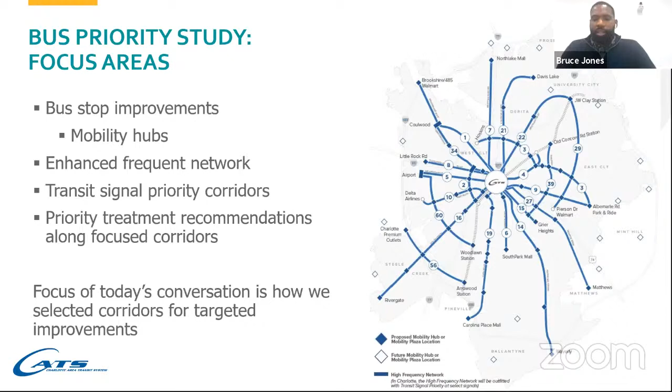In addition, we've identified focus corridors where we'll identify additional treatments we could potentially roll out to help improve speed and reliability. That'll be the focus of what we're looking at today in this presentation, and also the open house I'll mention later.

Before we get there, I mentioned some bus stop improvements we'll be looking at. This is one example of a mobility hub, known as a mobility center. Mobility hubs are important because they provide vital connections for riders, making it easy to transfer between different services. Picture what we have at our light rail stations — when connecting to and from light rail and bus, think of JW Clay or University City Boulevard station, where we have dedicated space for buses to lay over, and easy transfer connections for individuals accessing the rail line and the bus lines.

Picture that service, but then mobility centers can also be lower level in terms of Rosa Parks Transit Center or Eastland Transit Center, where we have connectivity between different bus routes that interact there. We also have dedicated space if we need to lay over, if the bus needs an end of the line point there.

We're also looking to improve mobility centers in regards to implementing additional amenities such as bicycle storage, off-board fare payment, and additional services to help speed up the boarding process, and also make it easier for individuals to connect to and from the bus network and other forms of mobility.

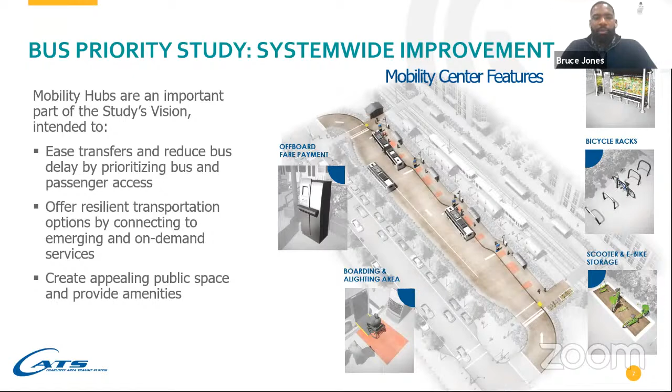Similar to a mobility center, we also have the mobility plaza. This operates where you have two routes that intersect at a major intersection. We'll have four far side stops so that we can provide easy transfer connections on the street level for individuals. Far side essentially means that we place our bus shelters after the signal.

Signal priority is being rolled out on our network. The way this works is that we'll be able to get through the intersection or clear the intersection, and be able to serve the stop so that we can drop off passengers without being delayed at the intersection. This also features improved amenities such as crosswalk improvements so that individuals can safely navigate to and from the bus stops if they need to transfer.

Additional amenities too, such as real-time information signage, wayfinding signage, bicycle storage, and also scooter storage, to help improve that first mile, last mile connectivity that I mentioned earlier.

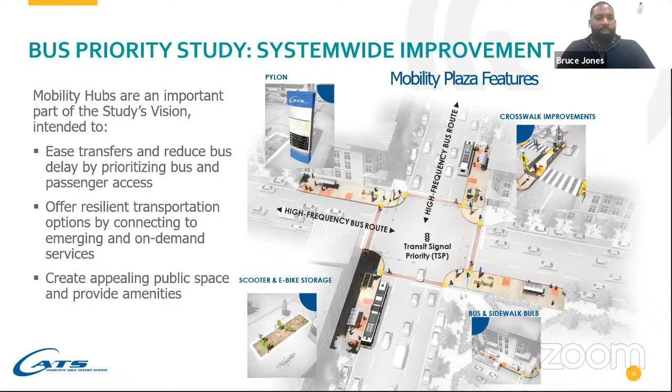So I spoke to the system-wide improvements, and now we'll go into the types of bus delay that we face and why it's important for us to implement priority treatments. We have a number of potential delays that we face on our bus routes.

The biggest one is dwell delay, meaning the amount of time that it takes for our buses to stop and pick up passengers - the amount of time it takes for the bus to stop at the bus stop, open the doors, pick up passengers, drop off passengers, and then continue to the next bus stop. That's what's known as dwell delay.

There's a number of factors that can contribute to that: stopping at bus stops, the amount of time it takes for individuals to board, the amount of time it takes individuals to pay their fare, and also if you're loading a bike, we typically have a bike rack for individuals to store that. And also the amount of time it takes for you to find your seat. So there's a number of factors that contribute to dwell time delay.

In addition to that, we also face signal delay - the amount of time it takes for us to clear an intersection or get through a traffic light. We have delay like any other vehicle in traffic, including waiting in line at the intersection. That's where signal priority comes into play to help us clear that so that we can get through intersections without facing increased delay times.

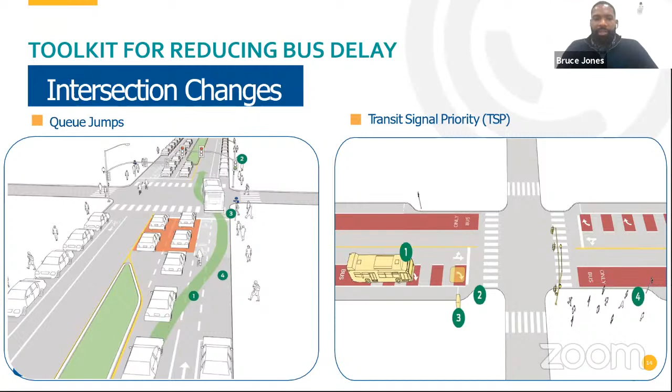How this works is the bus will pull up to a designated spot at the intersection. Once it reaches that point, it'll get a special signal that permits only the bus to continue, so it essentially jumps ahead of stalled traffic. All other traffic at the intersection would still have a red light, and pedestrians would not be able to cross. The only vehicles able to clear the intersection will be the buses, giving us a head start to clear some of the congestion we face there.

In addition to that, looking at how we roll out our bus stops is another key component, looking at how we can improve the bus boarding process by offering real-time information. That includes signage, but also the new real-time app we recently rolled out. This provides real-time arrival information on our buses so individuals can understand and know when their bus is running behind or on schedule, and adjust their schedule as needed.

Also offering enhanced amenities at the bus stop, making sure that we have amenities in place that help speed up the bus boarding process, and also looking at how we can provide a comfortable experience for passengers as they wait for the bus.

In addition to that, looking at where we can consolidate potential stops. If we have a stop on every block, that means the bus would have to stop more. So we look at strategic locations for bus stops so we can travel along routes quickly, but also build on offering additional amenities so that if individuals have to walk further to get to a bus stop, the trade-off is they would have amenities such as seating with shelter and coverage to help protect them from the elements.

In addition to that, yield-to-bus rules and extending the sidewalk as well, so that we don't have to pull over to the curb and face those delays with re-entry to get back into the line of traffic to continue along the route.

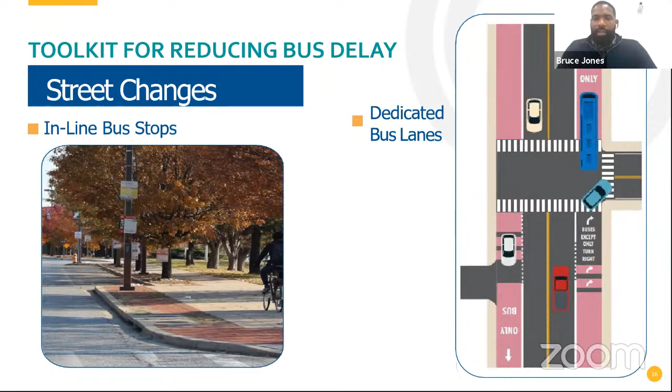Next, we have fare collection changes. This is where we have off-board fare payment. A number of you might be familiar with this if you use our light rail stations, for instance—a lot of our light rail platforms have the ability to purchase fare before you board the train. So we're looking at how we can implement or integrate something similar at the bus stop level as well.

And then also looking at how we can move towards non-cash fare payment, using maybe smartphones or any other type of solution, so that we can help speed up the boarding process as well. These are all toolkits that I mentioned for potential treatments.

We have two other examples, including all-door boarding and level boarding. All-door boarding includes picking up passengers from both doors at the bus stop, giving individuals the ability to pay fare at the back of the bus as well, which helps speed up the boarding process.

And then also level boarding—similar to what we have at our light rail stations, where individuals are able to board the train without an ADA ramp being deployed. Having level boarding at our bus stops helps improve and speed up the boarding process for individuals traveling by wheelchair, or if they have a stroller or another similar item they're boarding the bus with.

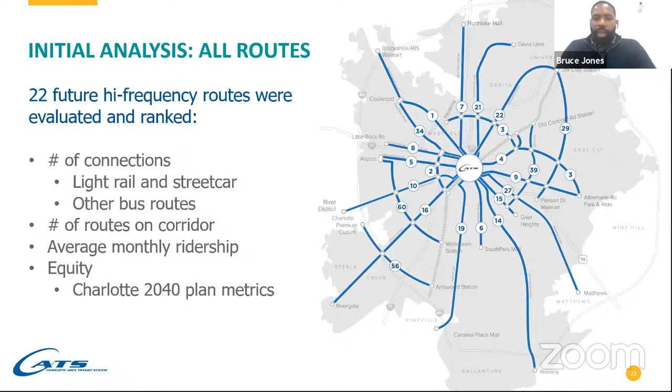With that, we identified 10 radial routes coming into Uptown and 4 crosstown routes from the initial list of 22 to move to the next stage. Those routes include Central Avenue, Beatties Ford, the Sprinter on Wilkinson, Monroe Road, Tuckaseegee, West Boulevard, just to name a few. The crosstown routes include Route 3 on The Plaza, Route 2 on Ashley, Route 29 to UNCC, and Route 39 along Eastway Drive. These routes were selected to advance to the next stage, narrowing the list down to 6.

And I say 6 because that was what we had due to project limitations with the budget. But the goal is to help us develop a program that we can begin to roll out throughout the network. So if we find we're experiencing delay on additional corridors, some of the treatment types we recommend can be applied to those corridors to help improve service moving forward.

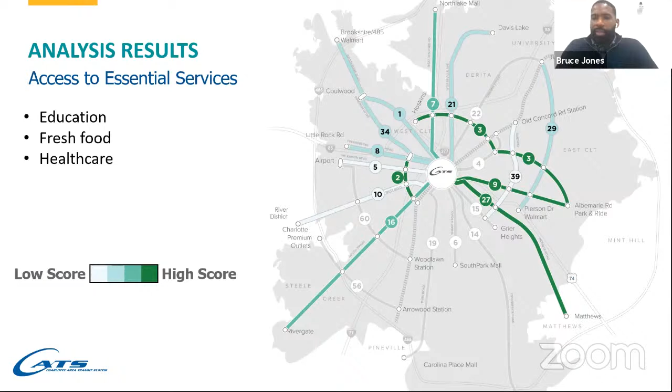We looked at how each route connects to education resources, fresh food opportunities, and healthcare. As you can see, certain routes stand out: Route 27 on Monroe, Route 9 on Central Avenue, Route 3 on the Plaza, and Route 2 on Ashley Road.

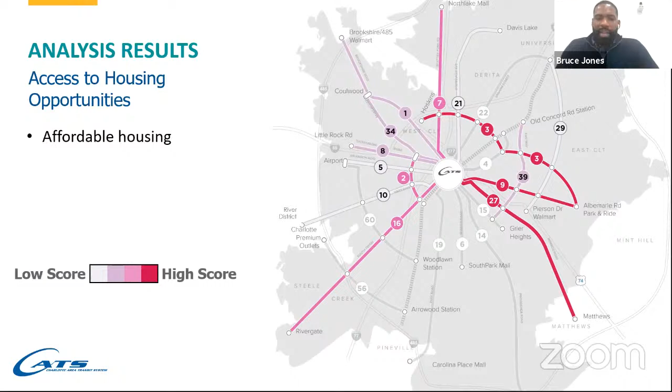As we continue looking at other objectives, we similarly ranked them according to how they fare in this category: access to affordable housing. Again, routes 9, 27, and 3 stand out, but Route 7, 16, and 2 also began to stand out at a middle level.

In addition, we looked at where we're currently facing bus delay—travel time or reliability issues I mentioned before. We found that specific routes, like West Boulevard, Route 2 on Remount Ashley, and the Sprinter route on Airport, face additional delay.

We looked at October 2019 metrics to help identify delay, and it was important to look at that for two reasons. One, because it was pre-COVID traffic, giving us an indication of where we'd face delay if traffic levels increased or similar patterns continued moving forward. Two, we used October because that's typically when we have the most service from a ridership standpoint, which helps us identify where we need to make improvements to the boarding process.

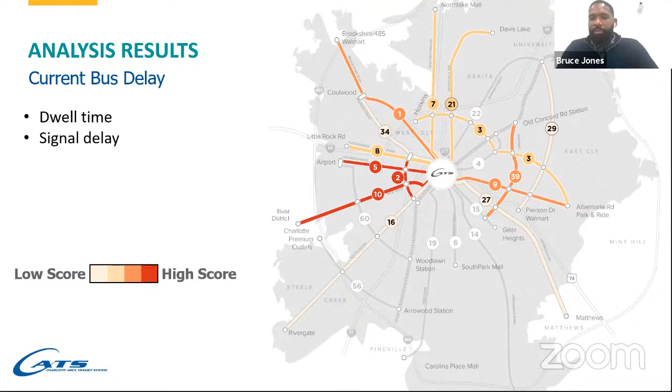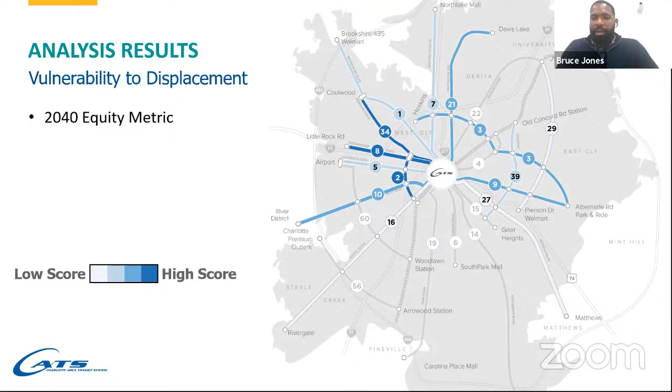Moving forward, we also used the Charlotte 2040 equity measure I mentioned, looking at how we serve areas with a greater proportion of individuals facing potential displacement. Here we saw Freedom Drive stood out, along with Route 8 Tuckasegee, and again Route 2 Ashley Remount stood out high in this category.

With all of those categories, we developed a composite score for how each route ranked. Based on those rankings, three routes stood out with the highest ranking in terms of how we can improve service: Route 2 on Ashley Road, Route 7 on Beatties Ford Road, and Route 9 on Central Avenue. We're initially focusing on these three routes.

As the study progresses, we'll identify three additional routes to focus on based on the metrics. We started with these three because they stood out in their respective categories. The additional three routes will take into consideration public input on how we can identify routes for improvement. With these routes too, we'd like to hear from you on whether you think these are the right focus routes, or if there are other areas we should look at. From there, we came up with specific scenarios on how we can improve service.

So first we looked at the dwell delay that we face.

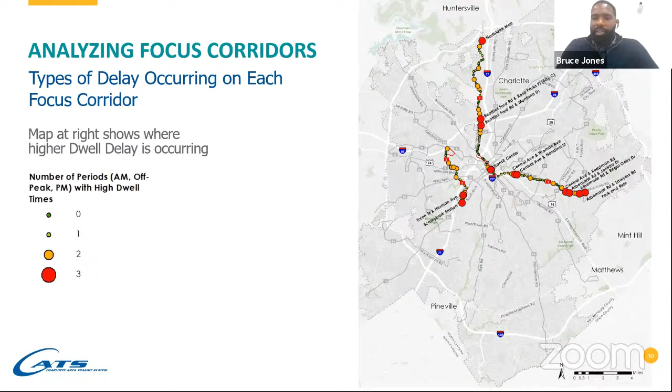As you can see on Ashley Road, which is this route on the lower left side of the map, we face greater dwell time on the Tryon portion and also on Remount Road. Beatties Ford Road is more centered around I-85 where we have the Rosa Parks Transit Center. Central Avenue is clustered more around the outer portion, Albemarle Road, and up to the Eastland Transit Center.

In addition to that, we also looked at travel and signal delay. Using these metrics, we identified additional routes and areas where we should focus, and we got similar results from this standpoint too.

For instance, on Route 7, which you see here in the middle, and I'll have closer shots of this in the next slides, we face delay on the middle segment of the route, closer to the Rosa Parks Transit Center. Similarly on Central Avenue, more so on that outer portion, and there's also delay on the inner portion as well.

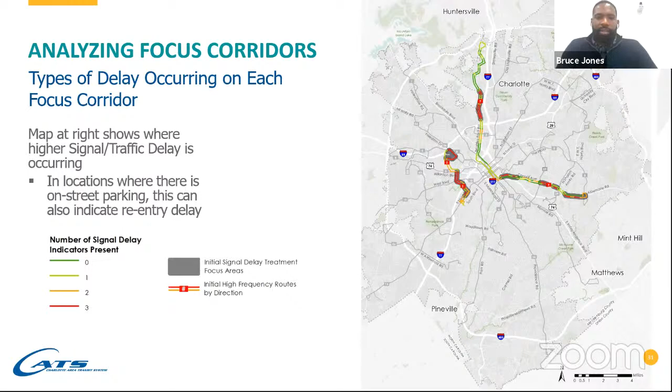So with this, we began to develop some initial potential treatment types that we can apply to help speed up service. This is Route 2 Ashley Road. The long-term vision for this route is to have it connect from the Ashley Freedom interchange down to the Scaleybark station. We identified delay on specific segments along that route. This route primarily operates along Ashley Road, Remount Road, and portions of South Tryon to access Scaleybark.

With that, we developed a treatment toolbox that we can begin to apply to specific segments. Some of the high level recommendations for Route 2 include all-door boarding, real-time arrival information, faster fare collection, level boarding where possible, signal priority, bus bulb outs, and queue jumps where possible.

As you can see here at the top, we have a segment from Ashley Road on Freedom and Allegheny. Some of the recommendations here, if you follow the chart, include faster fare collection where possible, implementing transit signal priority, and looking at potential queue jumps where possible. I should state that these are, at this moment, considerations for how we can improve service.

We'll be continuing to look through this list to see if there are other alternatives that can help us improve service as we look at these routes long-term, and then the 3 additional routes we'll identify. In addition, we have the segment from Wilkinson Boulevard to South Tryon, where we recommend faster fare collection, level boarding where possible, and also bus bulb outs to help improve the boarding process for individuals.

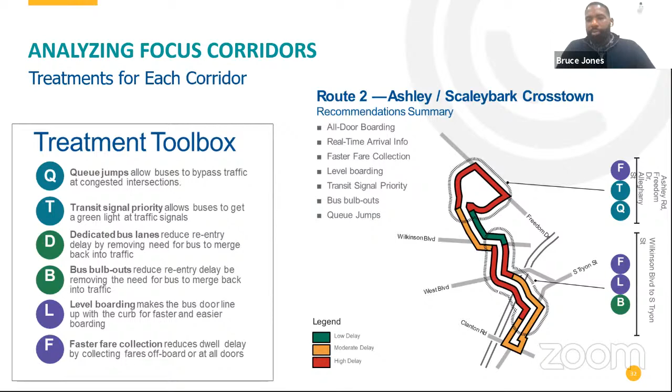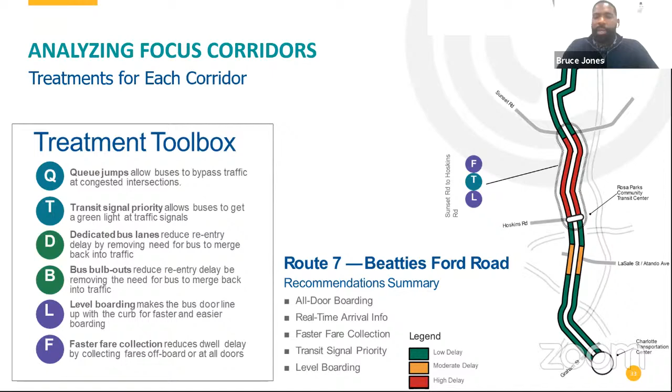We did a similar look at Beatties Ford Road, where we identified potential treatment types. Here we have the segment from the Rosa Parks Transit Center up to between Sunset Road. Some potential treatment types to help improve service include faster fare collection, signal priority, and level boarding. Similar to what we saw on Ashley Road, we have different treatment types that could be potential solutions for how we improve speed and reliability on some of these routes.

These are some of the recommendations or suggestions that we have at least. None of these are final. We're still going through the process of identifying what treatment types would help or be appropriate for the different segments. But we wanted to present this to you, the public, to get your input to help us refine some of this and make our recommendations, which we'll bring to you early next year.

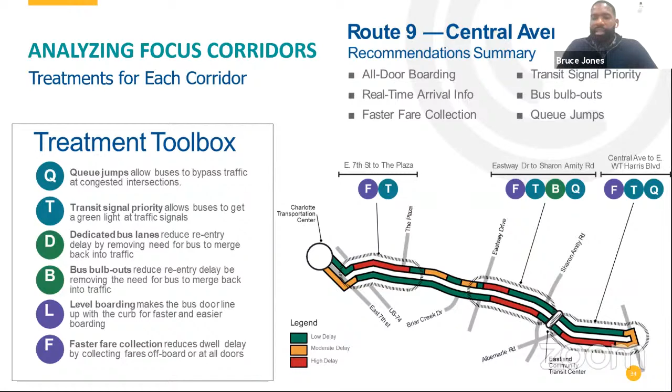As I mentioned, some of the next steps include continuing to develop recommendations for additional corridors and refining the recommendations on mobility hub locations and mobility plazas. We'll present this back to the public early next year to get your input so we can make refinements.

Coming soon, we'll begin to implement signal priority throughout the network, which will help us communicate with traffic signals to improve service.

We also just rolled out our real-time app so individuals can track bus arrivals in real time. If you have access to the App Store on Google or Apple, feel free to download it and test it out to see when your next bus will arrive at your stop. We'll also be considering new services.

It's important for us to improve first mile, last mile connectivity—the connection to and from our transit lines, especially frequent transit lines. As we work toward goals from the Charlotte 2040 plan, such as 10-minute neighborhoods, we'll look at rolling out mobility hubs and potentially on-demand service to connect individuals to and from those frequent corridors.

Those are some of the next steps we'll be looking at, and we'll present more information early next year. But for this initial round of feedback on the priority treatments recommended for some corridors, we encourage you to stay involved. If you'd like a more focused presentation with your neighborhood or community group, please contact the project team.